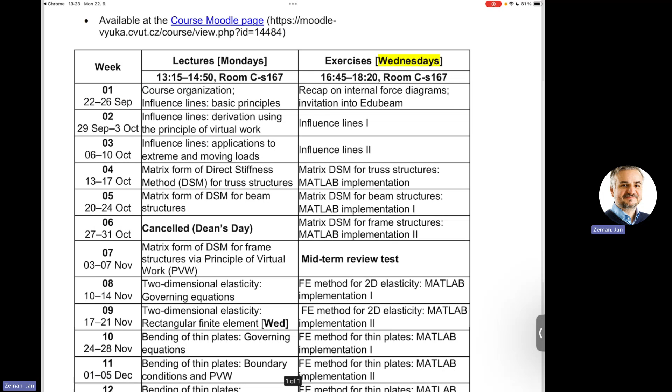Okay, so that's it. Then there is one bit which I should have written in the official information, but I didn't. I actually got some requests whether you can be absent from some lectures or exercises.

I'm trying to do my best to record all the lectures and problem sessions. So if you would like to skip it and listen to it afterwards, you are more than welcome. You can do it if you wish, if this is your preferred mode. A word of warning is that I'm not 100% successful in recording.

For instance, this colleague used this past semester, and he can give you more insight on whether it was worth the effort or not. But sometimes I forgot to record audio, for instance. So in my age, you cannot ask for more.

So there is no obligatory attendance. It's really up to you whether you learn it from the lectures here, recorded lectures, some YouTube videos, whatever you prefer. What counts is the result.

What is, however, required from my side is that in the 7th week of the semester there will be midterm review test, and this is something which should be taken on site and in person. Of course, if there are some very strong reasons why you cannot participate, that's fine, you can repeat it.

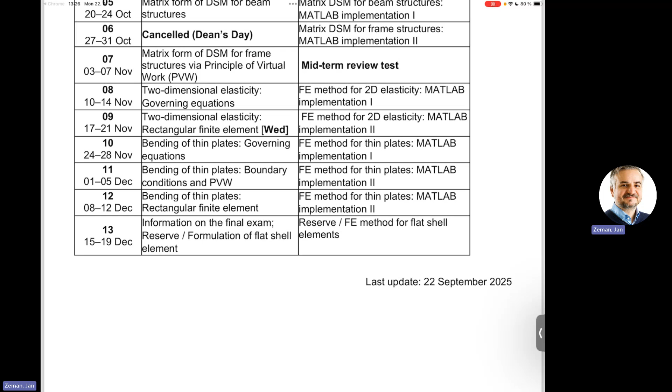Okay, so the second thing is related to the grading policy. There are three things for which you can get your final grade.

The first one is based on homework submissions. There will be at most 5 homework assignments, each worth 5 points. So you can get from your homework solutions 25% of your final evaluation. So this is one thing.

The second thing is the midterm review test, which I already announced. This date is not solid though. Well, it's actually wrong. It's the 5th of November because it will be taken on Wednesday.

And for this test, there is some minimum threshold to be passed, so at least 50%. It covers basics.

Sorry, what is wrong then? Yeah, you know, some dates may be wrong. I may drift from earlier or later. So if there is some inconsistency, please let me know because chances are good that...

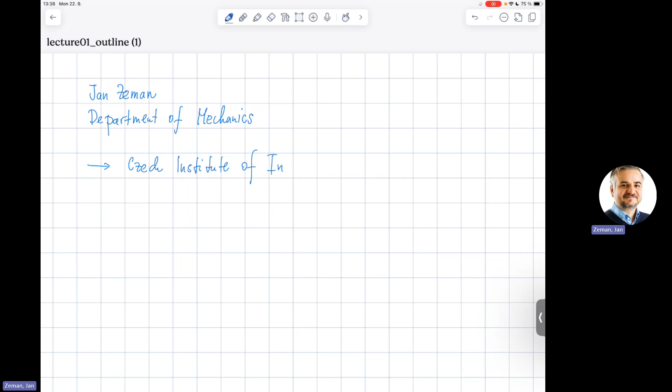of Informatics, Robotics, and Cybernetics, which is actually this plastic building close to the metro station. So my office is located in room B-223, third floor. If you would like to visit me in person, just let me know in advance. I will pick you up in front of the building, and starting from that, everything will be fine.

So this is one possibility how to get in touch. Another possibility is to have a look at my webpage, which is openmechanics.group/people/Jan-Zeman, and in there you will find a link to my agenda.

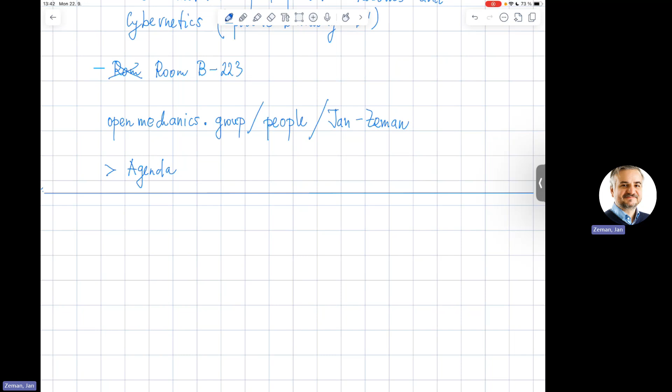Okay, so now let's briefly move to this slightly less administrative part of this first lecture, which concerns the scope of things I would like to cover with a bit of your help, of course, in this semester. So there are three topics which I would like to cover in this course, which is 132STA, Structural Analysis.

Again, this consists of three major blocks. One is something we will start already, which is called influence lines. I do not know whether you have heard of it before or not. Then there is the second part, which bears different names.

I like to call it matrix statics, matrix statics of frames and trusses. And then there is one bit which is actually related to extensions of those to some more interesting structures. I will just proceed in two steps.

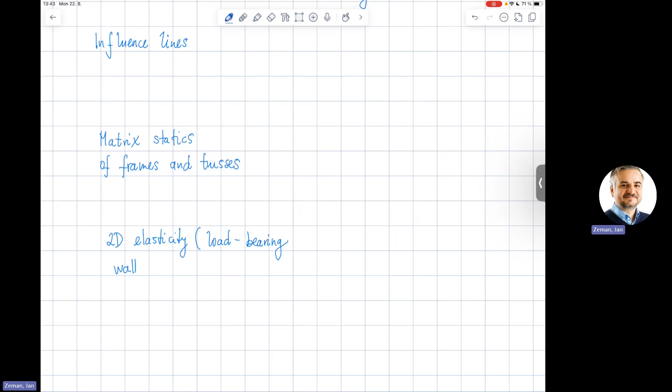So one is something which is called 2D elasticity, or load-bearing walls, if you would like. So this is yet another chunk of material. And the final bit is focused on something which is called thin plates.

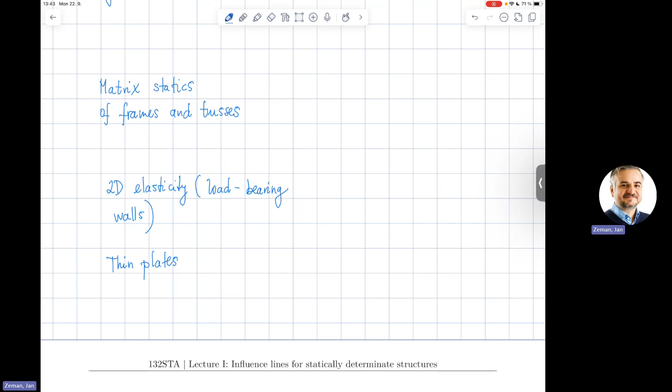Okay, so that's it. So this is what I would like to cover in the course. First are these influence lines, which is something which is completely new, unless you already heard it back at your home university. This matrix statics of frames and trusses is something which is really heavily dependent on the part of the previous course, the structural mechanics 3E. So here I will assume some previous knowledge.

When it comes to 2D elasticity, I will again assume, but I will recap it briefly, that you went through the equivalent of the course, which at this university is called Theory of Elasticity, but it's just an ordinary strength of materials course. And these thin plates, again, as far as I'm concerned, this will be some new piece of information presented.

So there are some prerequisites for the course, and these are mainly here and there. And throughout, I will just assume some basic familiarity with fundamentals of structural mechanics, mainly for statically determinate structures. Okay. So for these influence lines, there are three subtopics. One is related to statically determinate structures.

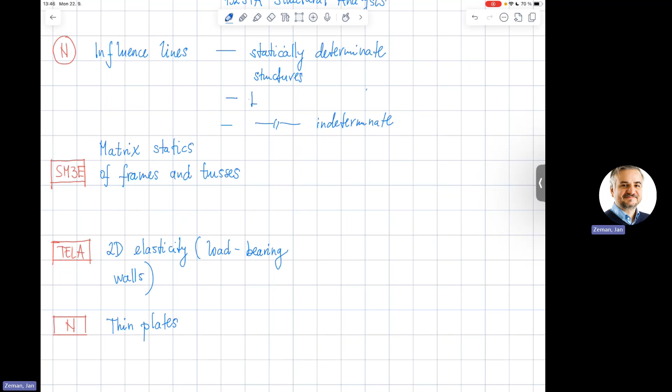This is something I would like to start today. Then there will be extension of statically indeterminate. And then, oh, sorry, my bad, this will be just the last topic. The intermediate topic will be then extreme load effects. And the third one will be statically indeterminate ones. This matrix statics of frames and trusses decomposes into trusses and frames. And there is no further subdivision in here.

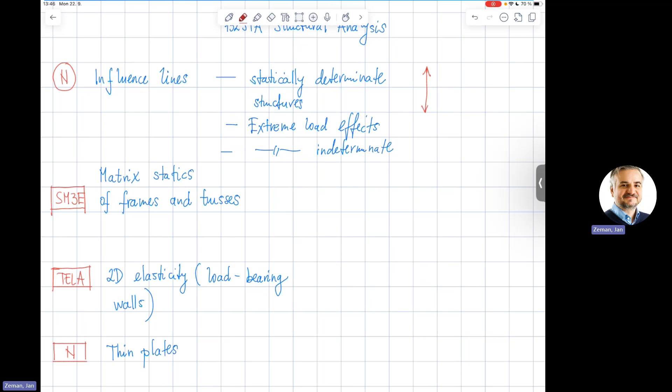And the reason why I'm actually organizing in this particular manner is that at the very beginning we will mostly rely on hand calculations. But also, at least for this statically indeterminate, we will also need to rely on some computer code. And there is one particular specialty at this university, which is that we have our own teaching-focused tool, which was prepared by one of our PhD candidates. And it's called EduBeam.

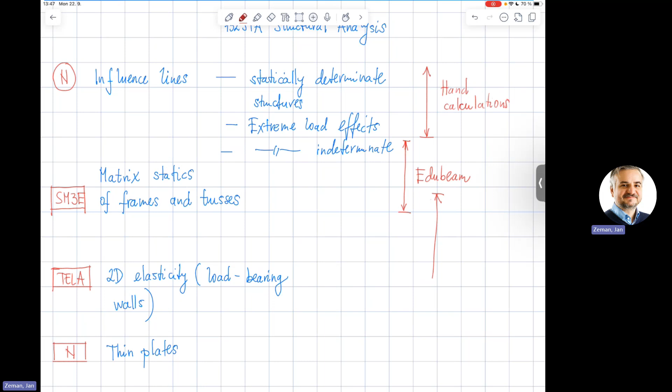So we will do this statically indeterminate analysis in EduBeam, and also use some information from that in terms of matrix statics of frames and trusses. And here we will make the final transition, which will help us in the rest of this course. So at a certain stage, we will make a switch to something which is called MATLAB, which is an acronym of Matrix Laboratory. It is a very old and very successful code, which, as the name suggests, actually has some means to treat matrices efficiently, in terms of writing simple instructions, how to manipulate them, up to computational efficiency, although this won't be so much of our concern in this course.

And actually, structural mechanics is one of the things where this was used in the very first instance. Because it turned out that all structural mechanics can be very conveniently written in terms of matrices. If you recall, those of you who attended the structural mechanics 3 course and passed it successfully, I wanted to highlight one notion. That notion was the stiffness matrix. This was some collection of numbers we actually extracted from the code. So it turned out that this is the most important stuff from the previous course, because this allows us to analyze structures on the computer.

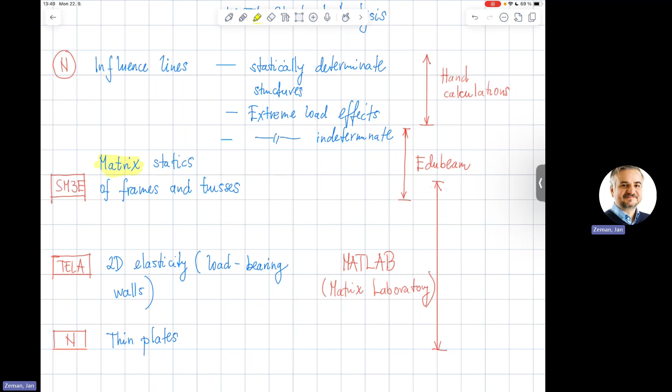So in brief, at least as I see the course, this is some kind of initial warm-up phase. This is the connection to structural mechanics 3, but actually the focus is on this part, and my motivation is to explain to you how, in principle, the codes which you are using in more advanced analysis work. It also has some consequences in terms of analyzing very quickly whether to trust the results or not, what is accurate, what is less accurate, etc. So this is something I'm trying to cover in the final part of the lecture.

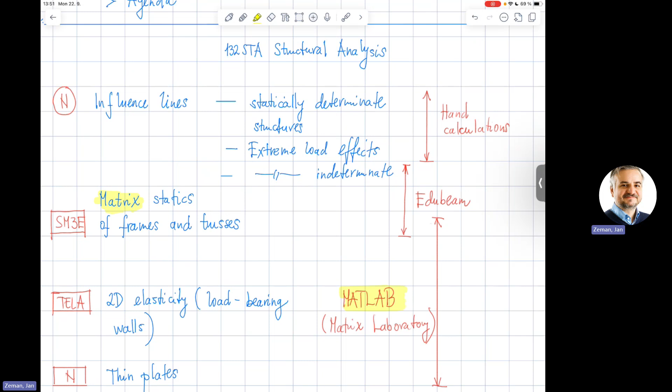But again, I would like to make you aware that at a certain point we will switch to something which is more computationally oriented. There will be no heavy coding involved. I will just hide everything into functions which I have already prepared for you. But this is just to avoid these very tedious hand calculations. So if you still recall how that part from the previous course of the general displacement method worked, this is exactly the point at which matrices and some simple programming language can save you a significant amount of work and also a significant amount of numerical errors along the process. So that's pretty much it.

Is there someone who has some prior experience with MATLAB, or is this something completely new to you? Okay, so at least you will learn something new during the course. Is there someone who has some prior experience with Python?

Yeah, so I'm afraid that for these new accredited studies, my colleagues decided to turn to Python. If you don't mind, I will just stay with MATLAB this semester because I have everything ready. But in terms of its use, it's not so much different, I would say, from Python, because all the nice things they of course stole and implemented in MATLAB. There is a version which is available to all registered students, which is fully online.

You can access it using your credentials from CTU, and it has something which is called notebooks, although they call it differently. So if you have ever used these Python notebooks for some parametric studies and things like that, I will give you exactly the same thing, but for MATLAB. So in terms of comfort of use, this should be comparable. It's even a bit more comfortable because this particular language is designed for treating matrices.

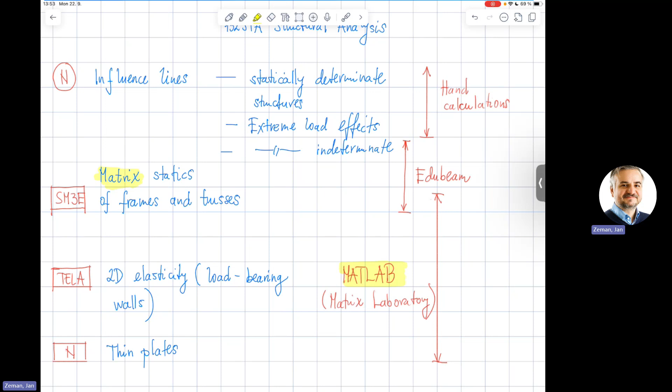So if not, I will just move to the very first topic, which concerns something which is called influence lines, although the title is a bit less accurate, I would say. And I would just like to give you some brief idea what this means. So what is so different about influence lines, and also what this is potentially good for.

So far, actually, the standard setup was that we were analyzing some structures, which I will just show here by something very simple, like this one, for instance. We have some loads acting on a structure. And what I was interested in is what happens at the level of some cross-section. So this is what was mostly interesting for me.

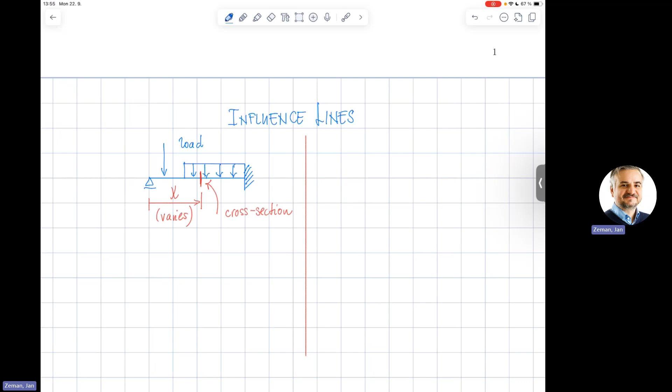So the argument which I would like to make is that what we were using so far is that this X, this cross-section location, varies, whereas the load itself is fixed. Okay? In terms of its location, magnitude, etc. So these are the models we have been concerned with so far. And the objects we were interested in, I will generally denote as Q of X, where this capital Q is some quantity of interest.

And the quantities of interest we have considered so far in structural mechanics were mainly related to the deflection or sag of that beam at cross-section X. So this was one thing which we were interested in. So as a result of the load, the beam somehow deforms. And yeah, well, this is utterly wrong, sorry. Or this is just a sketch. And what we are interested in is the vertical displacement at a given cross-section. So this is just an example.

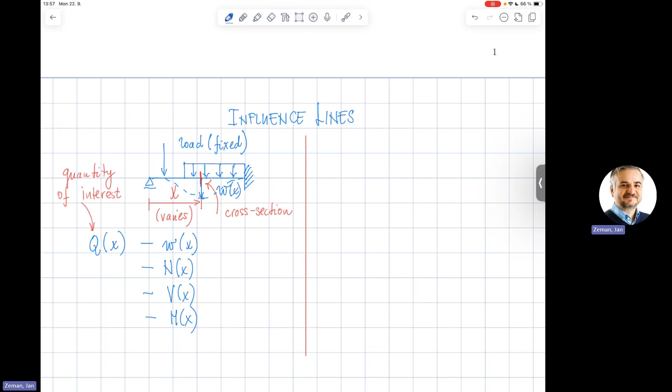So again, the other thing we were interested in, particularly for structures which are subjected to, sorry. So what we are also interested in are these objects which I now list here. These are called internal forces. And this N in particular stands for something which is called normal force. This is something which is called shear force. And this M is bending moment.

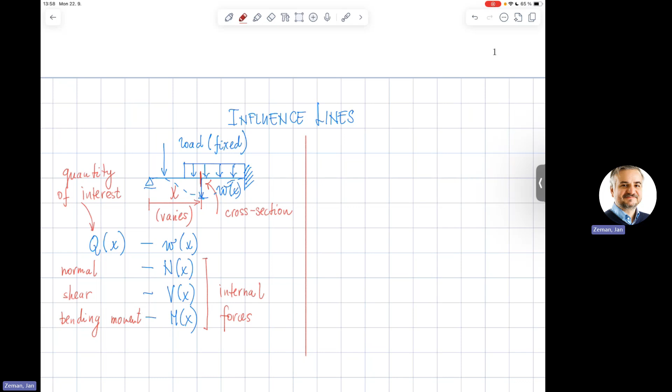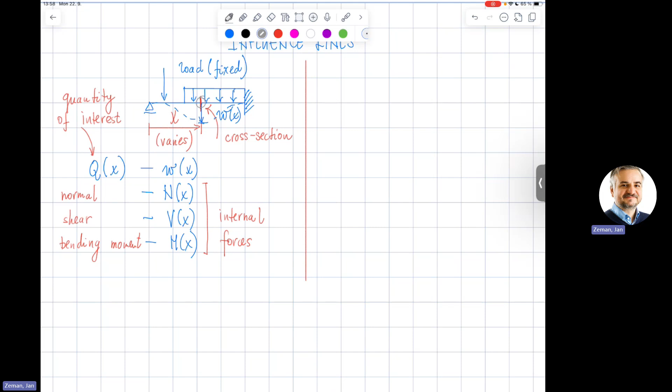Again, if you just have a look at this reference slide book, the letters they are using there are different, but the meaning is the same. Okay. And I would just like to remind you that in order to visualize these forces, visualize is a bit strong a word, just imagining what these are, the only thing you have to do is to have a look very closely at what is happening around your cross-section of interest. Zoom in. And just have a look at the forces which are acting on this very small segment.

Where I would like to remind you that these internal forces, if positive, are oriented in this direction when it concerns the normal forces. For the shear forces, the positive orientation is this one. And for bending moments, the positive orientation is that one.

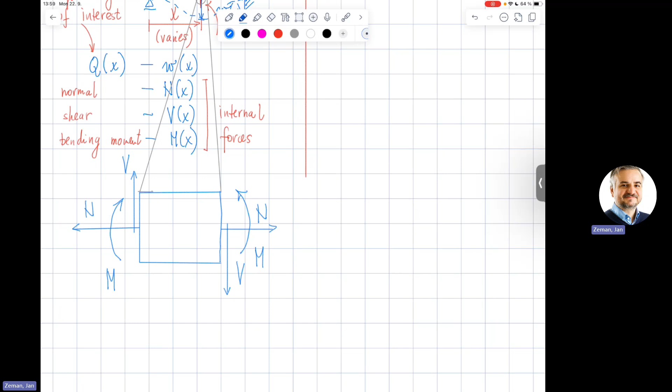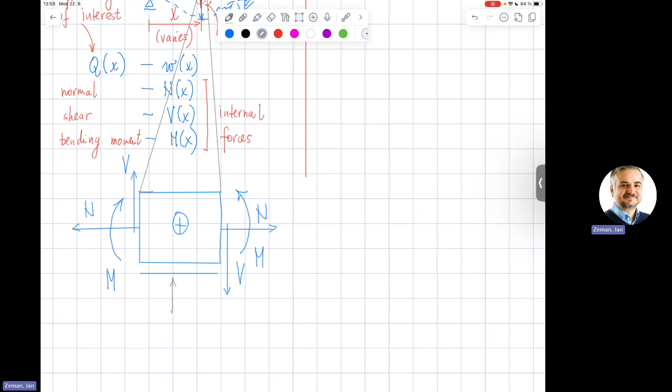And again, I don't know how people do it at your home university, but here in Prague, or perhaps in the former Soviet Union satellites, we usually depict it in this way, meaning that this is the positive orientation of the forces. And this is something which is called bottom fibers. Okay.

This can equally well be represented or explained by referring to something which is more in the spirit of strength of materials or elasticity, which tells you that actually, this is the solid part of the structure which remains.

from this original one. So I just separated it from the remainder of the structure by these two virtual cuts. I got new surfaces which are virtual in the sense, but these forces exactly take into account the effect of the remaining part of the structure.

And I will say that this is something which is called positive surface or positive area. This is because the missing part of the structure goes in the direction of the positive x-axis. This is something which is called negative surface, cross-section area, whatever, because this goes in the opposite direction. And if this red arrow goes along or opposite to the coordinate axis, then the rest follows.

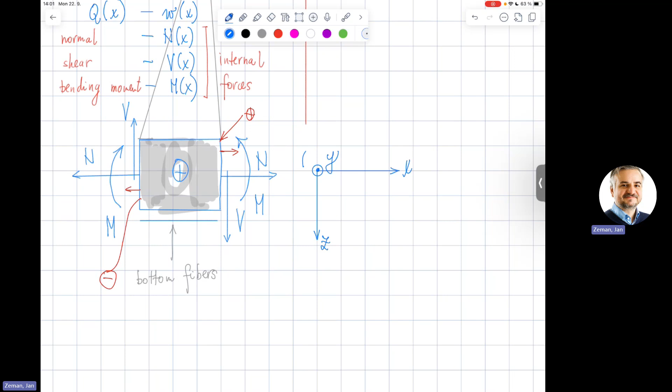For that, we also need to invoke the right-hand rule, which says that if I just orient myself along the corresponding axis, then the fingers of my right hand show what is the positive sense of rotation, and this is precisely here.

And finally, I also need to introduce some kinematic quantities which are somehow related to those, and we will use this a lot in this course, which is called W, the vertical displacement, the deflection. If there is horizontal displacement of my cross-section, which is usually because there are some horizontal forces acting on the structure, it's called U, and the cross-section rotation is called phi.

So this is what I have already explained. This is horizontal displacement of a cross-section, and this is something which is called cross-section rotation. And x, y, z, these are coordinate axes.

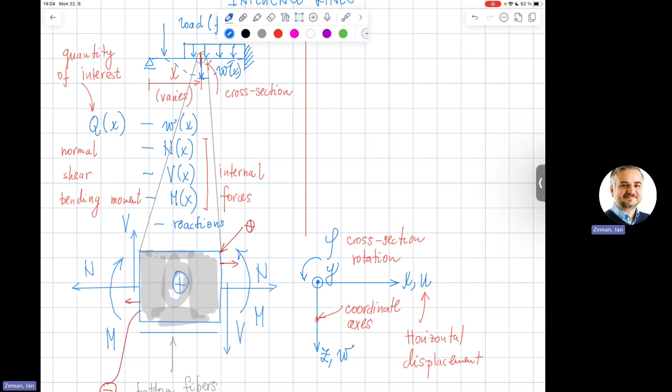And I also forgot that the thing we were interested in as well in this particular case were also reactions, as quantities of interest. So sorry, this is something which was missing in my list. So now I threw at you a bunch of terms, symbols, etc.

So is this something which you somehow find natural or not, or you are used to something different from your home university? So any difficulty with that? All is fine. You all know what I meant by these individual terms. Perfect. Okay, so this is the mindset we had up to this point.

In the part which will be dedicated, that's the word I was searching for, to influence lines, you need to switch your mindset. The situation is different. You have the same structure. Just for the sake of argument, I will just let this concentrated force here survive. And I will also pick precisely the same cross-section, which I will also highlight in red.

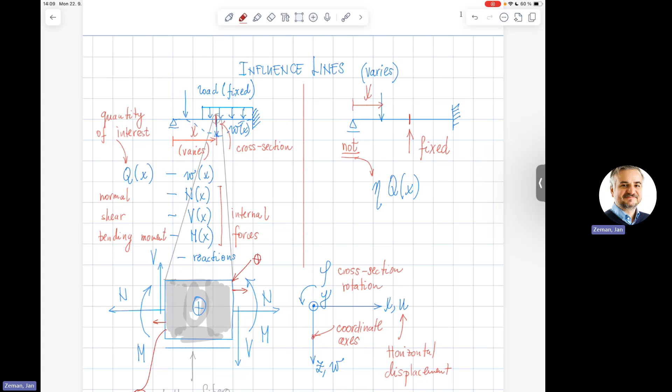And just to make it very explicit that I'm talking about something different from the left or right, because people usually mix it up, and yeah, I mixed it up as well as a student, I will put here this eta, but you can put any different name associated with it, and this is what tells me that this is not this quantity of interest. It is something different. It is not shear force in the given cross-section, it is something else.

So did I make myself clear? Okay.

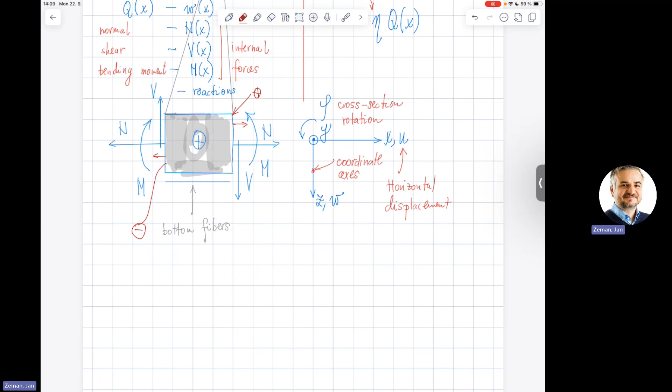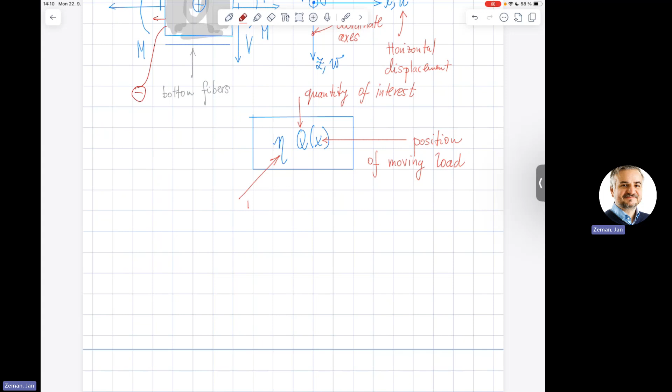So again, the summary of this introductory part is related to this notion of eta, or any different letter or symbol or whatever you wish, Q of X. Well, this Q is the quantity of interest, this X here parameterizes the position of the moving load, and this eta here is to highlight that this is the influence line, not the quantity of interest.

And again, this was meant mainly as an appetizer. So now we will spend some lectures and problem sessions or exercises trying to understand how these should be constructed, starting from some basic principles up to something a bit more advanced. But of course, just to start the motivation properly, there are potential applications. These potential applications are at least threefold. And perhaps you can bring something new, some new viewpoint.

The first one is really to analyze some extreme effects of moving load, in a very special regime, in which this car moves rather smoothly, so it is not really speeding up. Because in order to apply this analysis, I still need to live in the safe world of statics, meaning I can neglect inertia. But again, there are quite some applications of that.

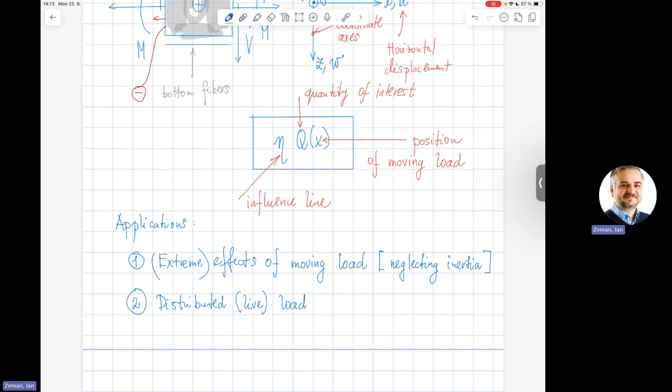The second one is related to something else, to the fact that you have some distributed load which is live, or not permanent. You have your structure of interest, and you wonder how to distribute this load in a way that for the quantity of interest you actually achieve the least favorable situation. Okay? So I have some distributed load with which I can play. I can distribute it anywhere I want. So I would like to find out which is the least favorable action.

And the third one, which I will not cover in this course, is that you can also use this terminology to compute the quantity of interest, to get this Q for arbitrary load, because the influence line is just a mechanical interpretation of an object known from mathematics, called Green's function. It is based on the observation that if for your mechanical problem you can get the response of the structure for an arbitrary point load, then for any other load you can obtain the result by integrating these contributions cleverly, provided your structure is geometrically linear and also linear in its mechanical performance.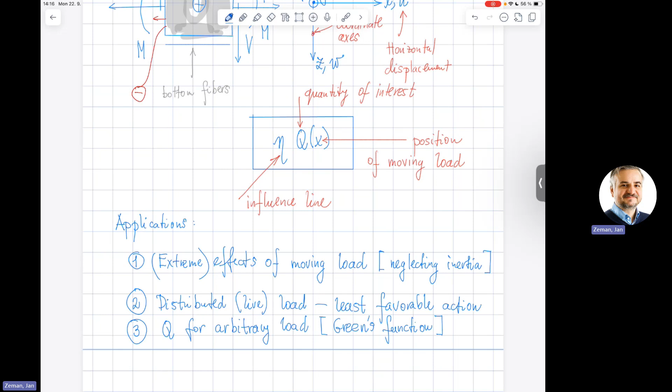So that's pretty much it. I just need to check what I'm supposed to do. No, I still have plenty of time. Sorry.

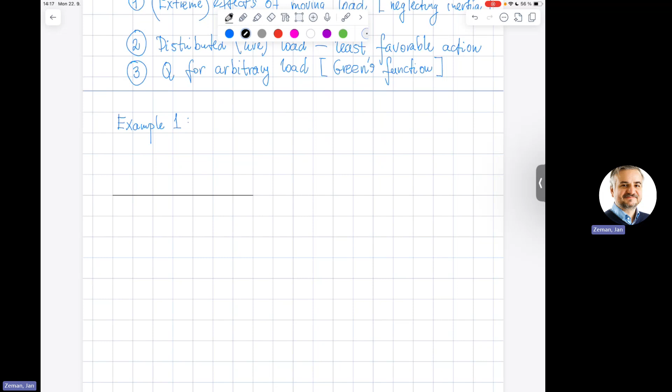So now let's have a look at how this works. We will start with simple examples. And I would also like to use this opportunity to refresh your memories of how to determine the internal forces and things like that, how this works by direct calculation. So I will start with the first example, which will be really simple: a statically determinate structure, in particular a cantilever beam. I'll try to be a bit more cautious now. So this is the graphical representation, or model, of my structure.

And just to rely a bit on your help, what do you think the thick horizontal line signifies? So what is the information I would like to show by drawing this thick line? Geometry. Kind of, yeah, partly. But, you know, this is something like this one, so it also has some geometric characteristics. So this is what this line cannot give me. So how is this called?

What do you think this graphical symbol stands for? And really there can be some disparity here because in other countries people may decide to use different graphic symbols. So what do you think this stands for? Yeah. So it's called with different names, so it's called fixed support.

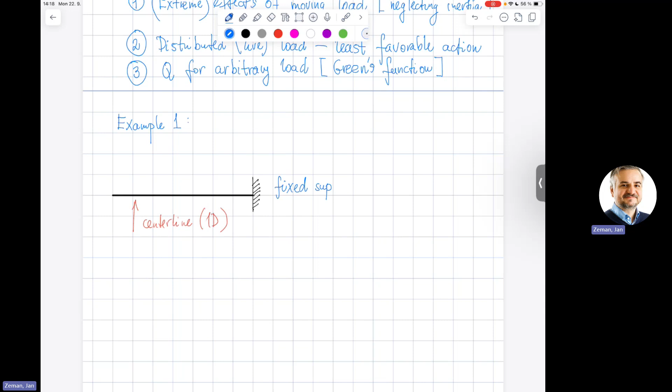It is something which is built in or clamped, you know, and as I did not appreciate last semester, if you are a native speaker, you probably know a bunch of additional adjectives instead of these three dots. People call it differently. Okay. What this means in particular. So if I just draw this scheme, what is the information I'll try to store in the picture?

Sorry? Yeah, 3 degrees of freedom are out. Nice. Out or fixed or whatever you like to call that. But now there is a question what you mean by the degree of freedom, and why 3 and which 3, right? So what is, in your opinion, the degree of freedom?

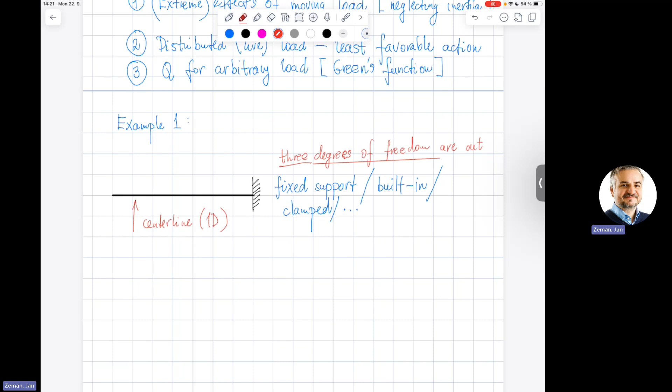Perfect. Yeah. Excellent. So you know, this is a bit elongated version of that. This is the center line. Now I just need to keep track of left and right, which is most difficult for me. So what this scheme says is some information about this cross-section in here, right? And it says exactly as your colleague suggested, that this cross-section cannot move horizontally, cannot move vertically, and cannot rotate, right? So this cross-section, this one, okay? And I do agree on that.

So now using this bunch of letters and symbols which I threw at you, how can I write it down in a way that I'm recycling them? So where in this scheme do I have something which tells me about the horizontal displacement of the cross-section? Yeah, so it cannot be at the top because I'm too short to reach there. So it must be at the bottom. So it's written here and it carries the letter U. This is W, and the cross-section rotation is something which I denoted as phi.

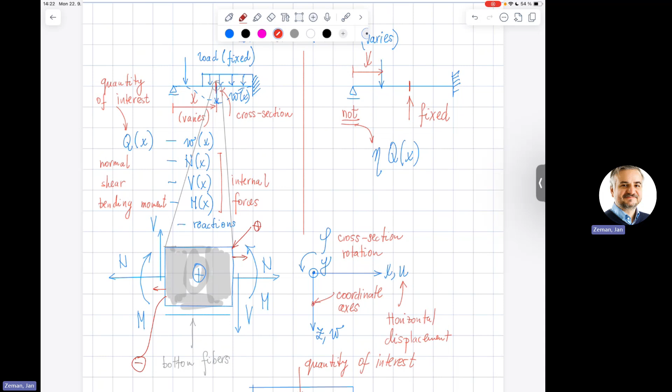So in fact, these are the 3 degrees of freedom, and the statement that they are out actually means that the U, sorry, and if you are making your own notes, please leave some space here. Yeah, but more clever than myself. So after the letters. So these are the 3 degrees of freedom which are taken out. They speak about this cross-section in here, which is not even shown here, but it exists. And we are just, at least at this university.

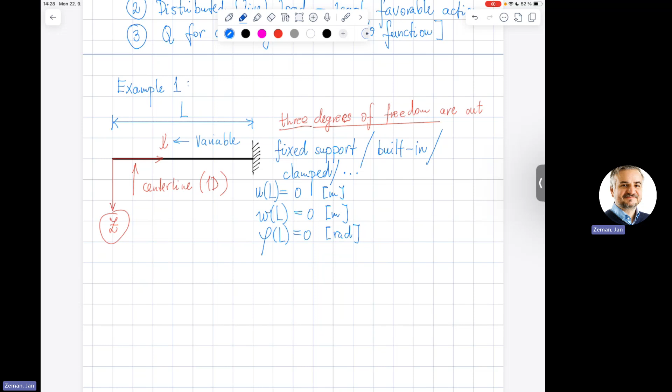So what I say in particular is that I will take this u as a function of x, but I'm not considering arbitrary x. I'm too lazy to write it in the fully blown up version. You know all that stuff with high probability, just to make sure we do not lose each other at the very first lecture - that would be a bit embarrassing.

So this is the standard setup we are used to, but in the framework of influence lines, actually the situation is a bit different, because this x now signifies something different. It tells us where this movable force of intensity 1 is. In some German textbooks, they even plot it differently with a wiggly line. I won't do that, but this is just to say that this is my force.

And I will explicitly write here the dependence on x. So this, as a function of x, means that I will take my force of intensity F, position it here in the coordinate system, and let it travel in the direction of the positive x-axis by the parameter or variable which I choose. So this is one thing.

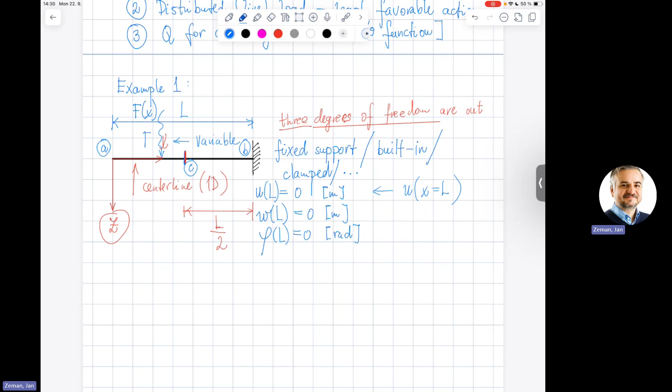Now let's have a look at how two quantities of interest look like. The first would be VC, meaning the shear force in cross-section C. And the second one would be the bending moment in the cross-section C.

Again, you can write it differently if you wish, but what I would like to highlight is that this is not an argument of ABC, this is just specification of that particular cross-section. So I would just like to highlight it by this.

Unlike the classical analysis, this is not a single value, this is a function of x, which usually is not explicitly written down, but in the first one, I'll just do it.

And just to highlight that this is not one value of the internal force for that load I just plotted there, but it's something different. It is a so-called influence line. I will put in front of that this eta. But again, you can pick any other way to emphasize that.

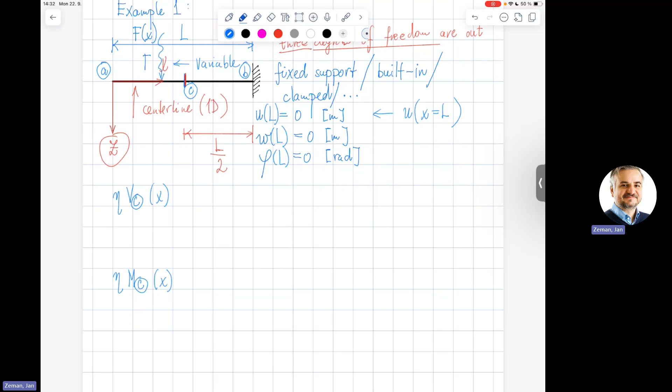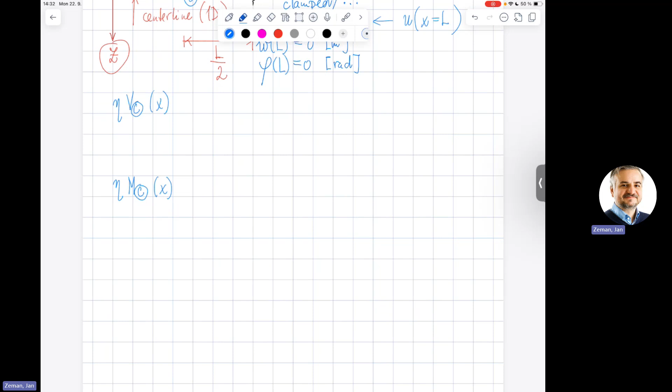And in order to plot those, we just need to play that standard game. And that standard game consists of taking my structure of interest, which is again represented by this center line, looking at the cross-section of interest, which is right in the middle here.

And now again, the particular technique can vary. But for the sake of argument, to make the argument as easy as possible - sorry, this is not what I wanted to say. What I wanted to say is that now my structure actually splits in two parts.

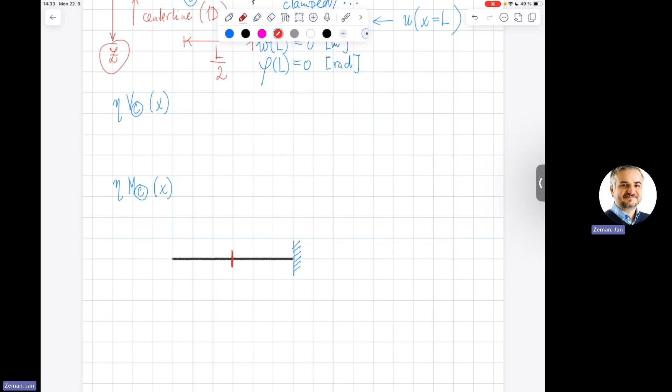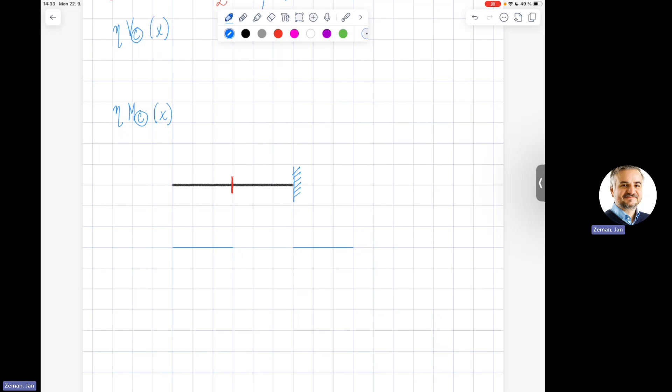This is not in reality. This is, of course, my mental experiment, or I don't know how we would like to call it. So for a moment, I will imagine what would happen if the structure was split in two. So this is here and this one is there.

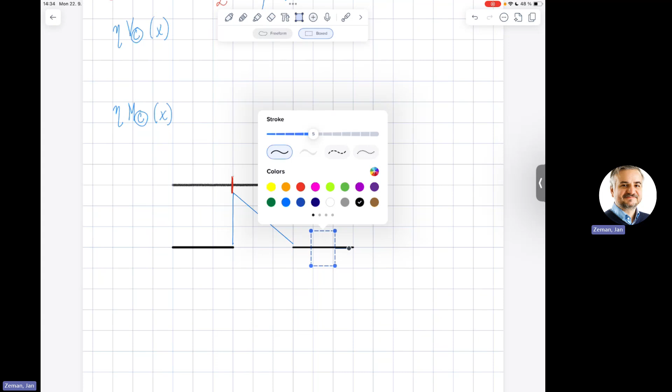These are the center lines again, so black and thick.

And I know that in the previous semester I advocated it with some way of analysis of the internal forces, but only after that I realized that in this very course, the standard way how people introduce it for the first time makes more sense in this particular context. This is related to the fact that now I will imagine my internal forces as they act in the cross-section C.

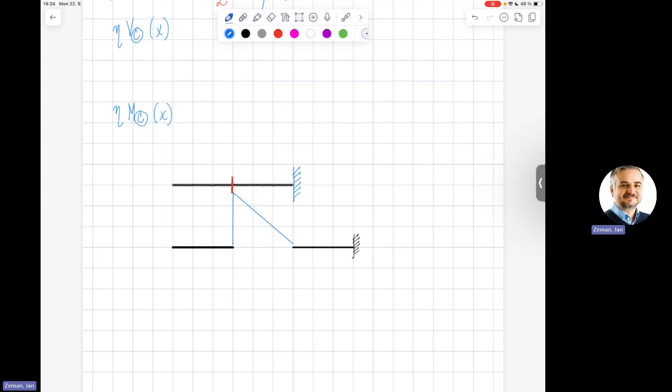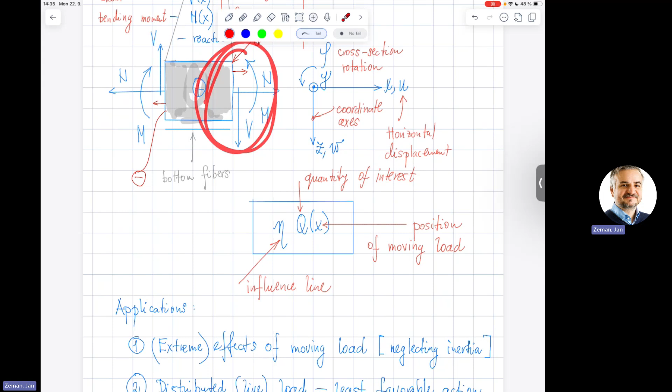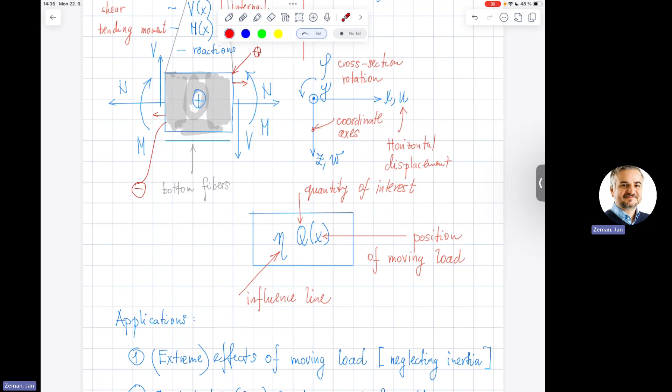If I refer to this particular scheme, then this is the orientation of the forces I should take into account on the left part of my structure, because here there is this cross-section to the left, there is the structure, to the right there is nothing, which is precisely what happens at this cross-section. So I would just like to highlight it a bit.

And the orientation of the internal forces would be aligned with the orientation of the coordinate axis. And here I would have this shear force, normal force, and bending moment, all of them in C, cross-section C.

And by the courtesy of Mr. Newton, I happen to know that because these are two bodies in contact, I just enlarged this gap only virtually. On the opposite side, I need to have these three forces acting like this one, and these are the same ones in magnitude, just with opposite orientation.

Here I will also have reactions, which I do not know and do not want to compute, because I'm a very lazy person.

And on this structure, I have the force, but the force which moves, right? So I will not draw it in that more elaborate way, but I have the force which moves, of intensity F, just to make the argument.

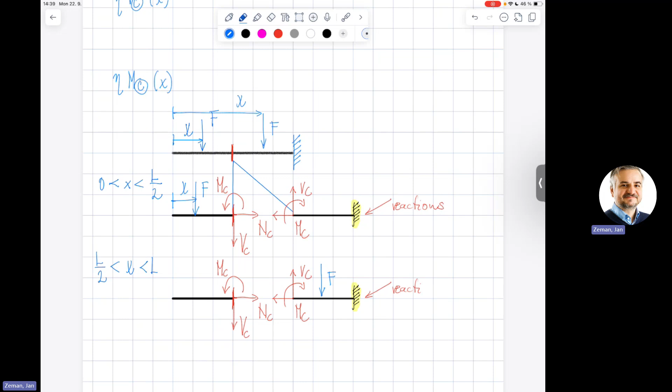But this x can vary, so it is a parameter or variable. Okay, so here I have two situations, and again I do apologize to all of you for whom this will create some complications. But the argument which I now would like to make is that internal forces...

...ensure equilibrium of each part of the structure.

Which means that I need to write equilibrium equations for a well-chosen part of the structure. If you think it over and want to spend minimum effort, this right part is prohibited because there are reactions acting here, since I constrained it in this particular manner, as you nicely explained to me. So I will always base it on the left part.

So I will just write down the equilibrium equations for the left part. And in this case, these variables become x-dependent, so there are no longer conventional internal forces, but influence lines of those.

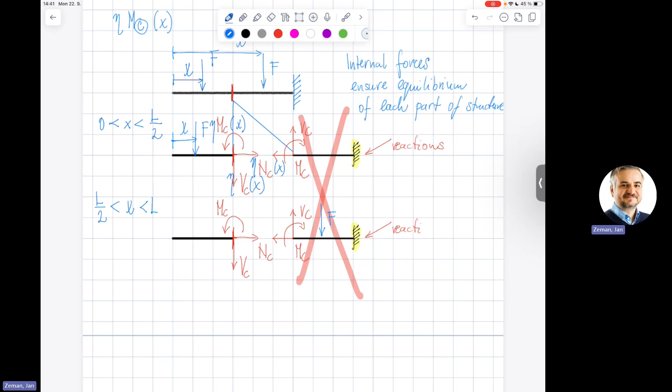If you have a look at what I wrote in that problem part, I was nice to myself and said that I do not want to know what this normal force is, because it is identically equal to 0, and hence it is not really of interest.

So, to proceed in the standard order, starting with something easy and moving to something more difficult, I can now forget about the right part. Sometimes I try to delete that part, but then I forget to return it back, so I will just leave it as is. Let's have a look at this left part.

So there is no force. If my force F moves past that cross-section of interest, it does not cause any external forces at the left part here. Or, put differently, this constraint, this support, takes all effects of the forces, so it does not need any help from the internal forces on top of that.

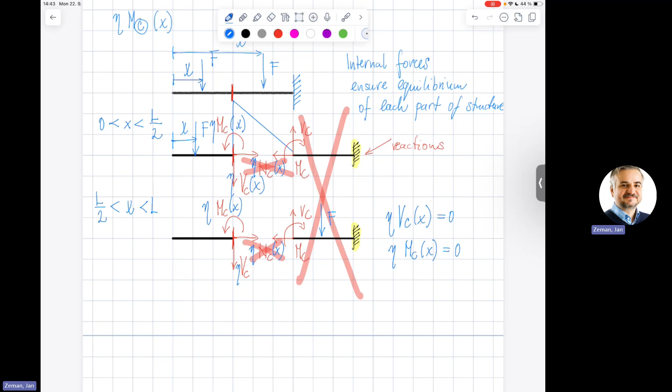I told you before that, unfortunately or fortunately, we are not in the world of mathematics but in applied physics in a certain sense, so all numbers have some units. What is the unit of shear force? Newtons. Bending moment has the units of Newton-meters.

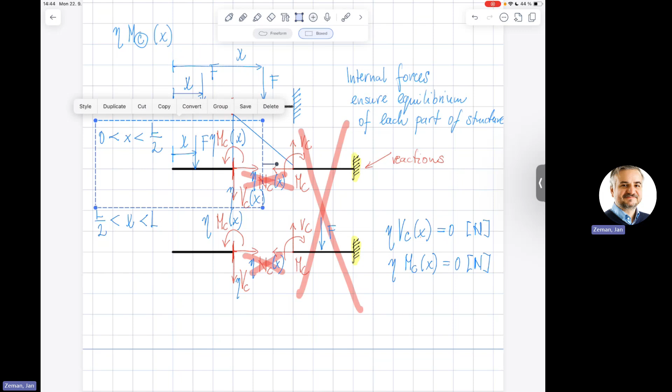Now the first situation, where x lies between 0 and L-half, will be a bit... it will also be easy, but for the sake of the argument I would like to analyze it separately, because this is the very first time I'm showing this. I hopefully will never do it again.

So now, in my interpretation, the internal forces, which come with fancier notation now, try to make sure that this piece is in equilibrium, which reflects the fact that the structure as a rigid body does not want to move anywhere. So to ensure this doesn't happen, I need to make sure the structure does not move vertically.

So I need to make sure that the vertical resultant of all forces equals 0. And I also need to make sure that around an arbitrary point, that force does not contribute to the resultant moment at the structure, which should equal 0.

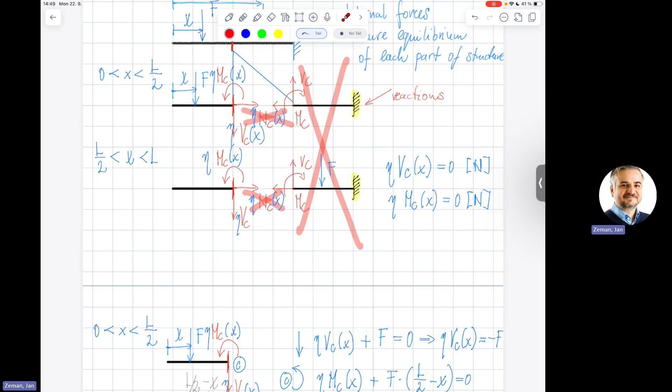So I got what I promised. I got some functions of the variable X. These functions are pretty easy to express because their dependence is actually visible only in here, on this one interval, and just for the influence line of bending moment. And these are zeros. So if I just use the rules which we incrementally introduced in all previous courses on how to draw diagrams of internal forces, I'm getting my influence line of shear force in cross-section C.

As the following picture. So sorry, this will be a bit less organized. So if I just imagine that this is my cross-section C. So if you recall, I had the constant value of minus F in here, and the value here is identically equal to 0. And the magnitude is F.

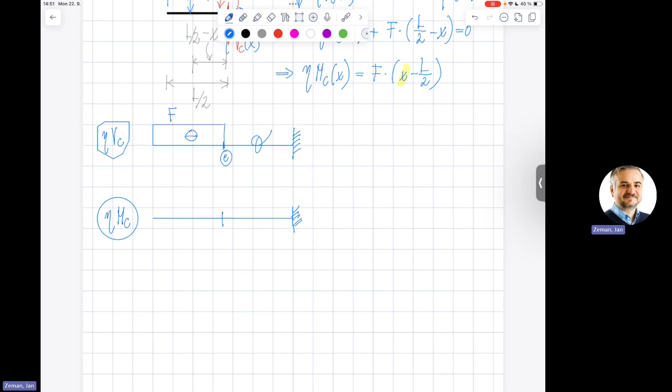Whereas for the influence line of bending moment in the precisely same cross-section, I can copy the value 0 here, and this zero is just normal zero. I do not know even why we're writing that. In between, I have this linear dependence on x, which I usually denote here by saying that this is a first order polynomial. And I know that a first order polynomial is uniquely defined by two values at any points or cross-sections of interest. So in particular, mine would be at the beginning and at the end.

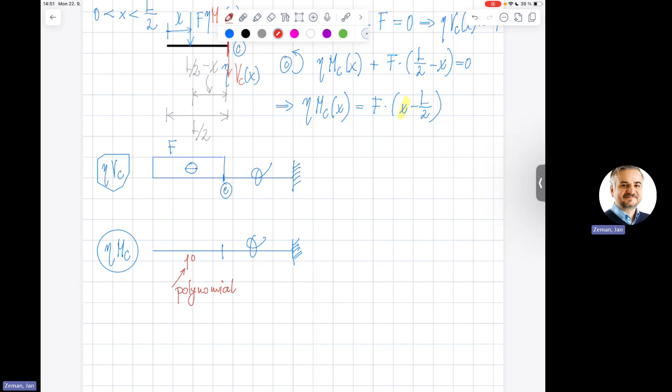So if I say that my x equals 0, this formula tells me immediately that the value of the bending moment is F times L over 2 with the minus sign. Here I will follow what is again used in this country a lot, which is that if the bending moment is positive, I will just draw it downward in the direction of the z-axis. If this is negative, I'm just drawing it on the opposite side.

Well, in this course, I'm aware that you can use different conventions, but just be aware, for instance, in more practically oriented courses on steel structures, etc., that some people really require it here. Perhaps no longer, but when I was a student, they were really picky about that.

And if I would like to compute a second value, then I just say that this is L over 2, the second point of the definition domain, and actually this term then identically vanishes, and this is how it looks. So the way I would like to plot it is this one, but any equivalent expression is fine with me. I'm just plotting the graphs of these functions, which are really easy to plot because the most complicated dependence is linear. Okay? And now you can play this game in multiple scenarios, meaning that you can pick different cross sections, you can pick different quantities of interest, but the story is still the same. Okay? So this is what I wanted to show by this example.